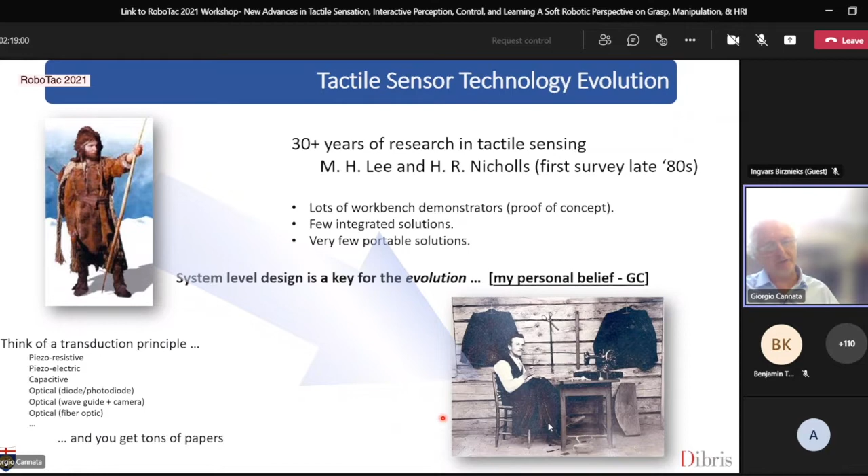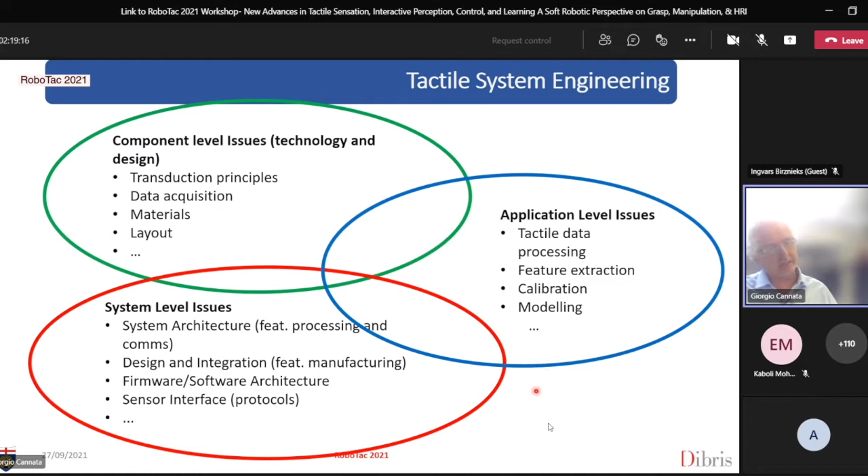So let me say that we moved over 30 years from very primitive demonstrators. We are now moving slowly to more sophisticated implementations. And the thing is that there's really a lot of issues that must be tackled if you want to implement a complete tactile-based solution. We arrived over the years at the development of a technology which is based on capacitive transducers. This is called CySkin. And as Catherine said, I cannot claim this is the best—it is just one of the possible implementations.

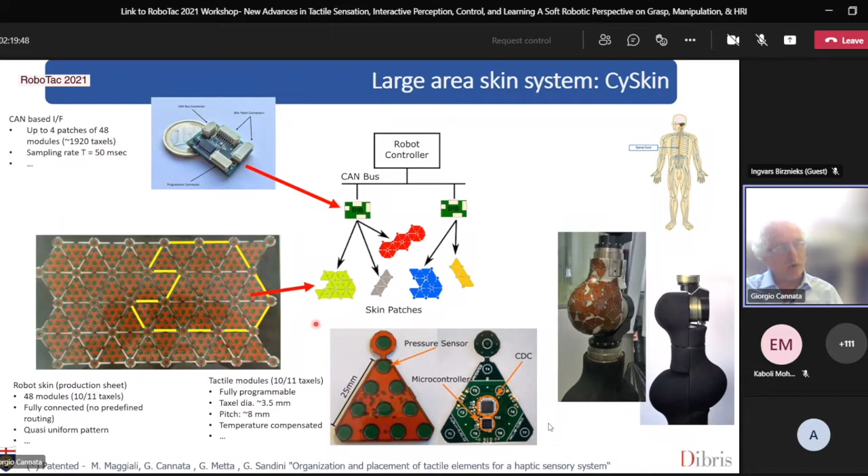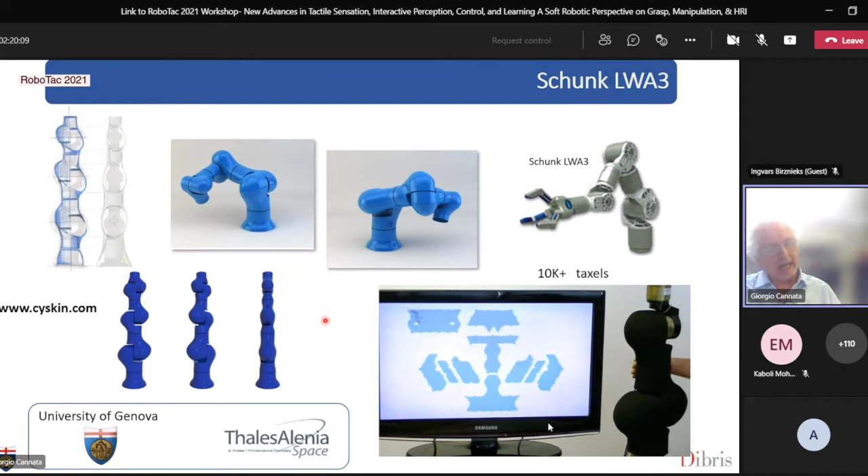So it's a pretty agile way of sensorizing different types of robots. We have implemented this covering of a Schunk LWA3 robot with over 10,000 taxels. I don't know if it's the most complex implementation, but it has been quite a challenge. And we also used the same technology to sensorize a Baxter arm, and again the number of tactile elements is pretty large.

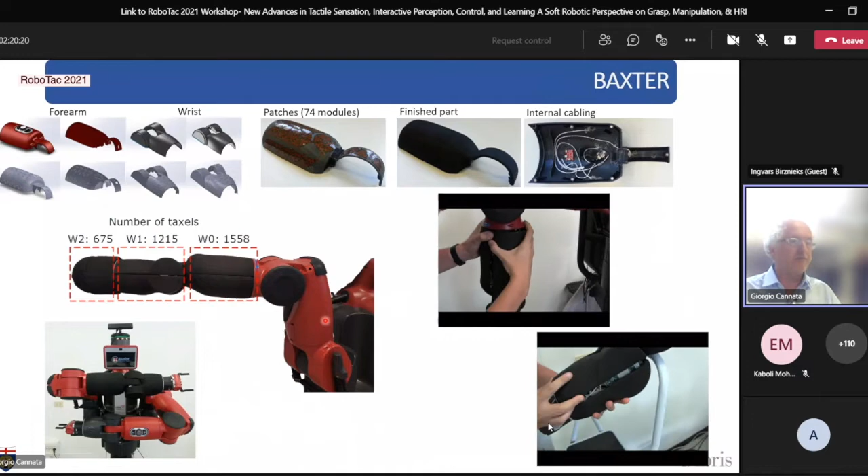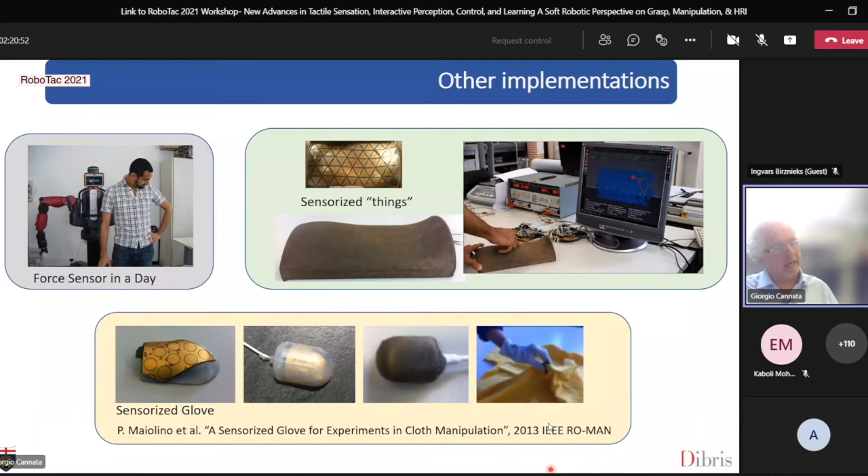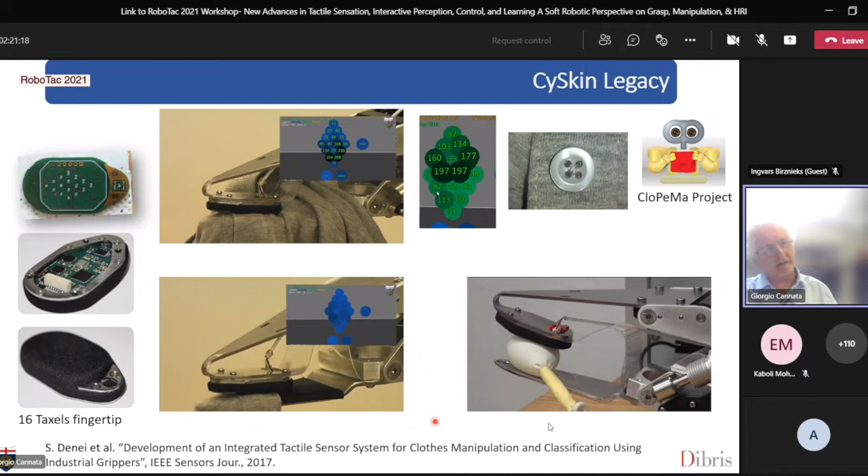Using the same solutions, we have implemented different gadgets. A force sensor in a day is a two-axis force sensor that was truly built in a few hours. We have used this technology to sensorize things, not just for robotic applications, and exactly the same hardware has been used to develop sensorized gloves. This is not enough, because using the same ecosystem we could develop other types of tactile sensors—in this case a fingertip with a 16-taxel matrix sensor that we used, and are still using, to recognize and classify textiles.

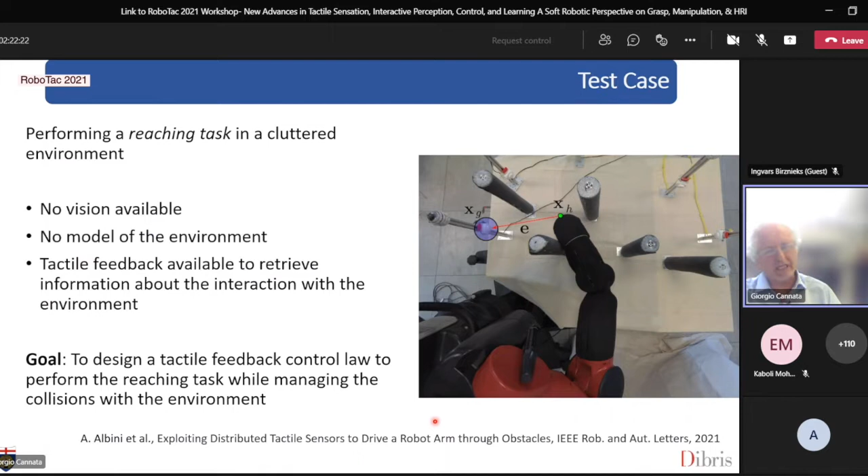The first step of the talk is related to robots touching. The test case I'd like to introduce is the problem of moving a robot arm in the presence of unknown obstacles, without using any of the state-of-the-art sensors typically used for this kind of application. So we assume that no vision is available, we assume no model of the environment is available, and what we wanted to show was that exploiting tactile feedback is a way of approaching this type of problem. You can think of this task as touching or finding objects beneath a table, reaching the workspace just using tactile exploration.

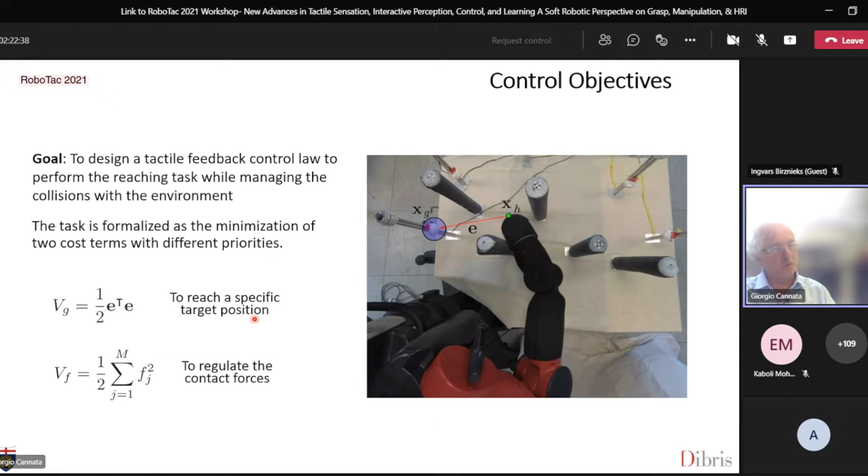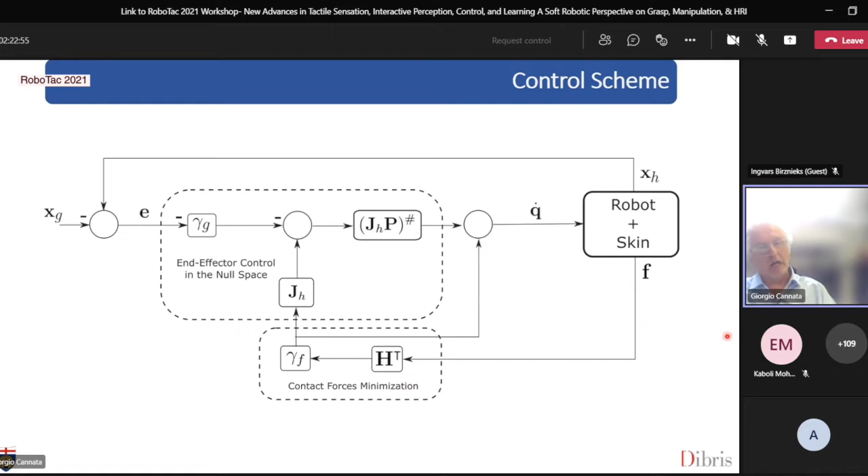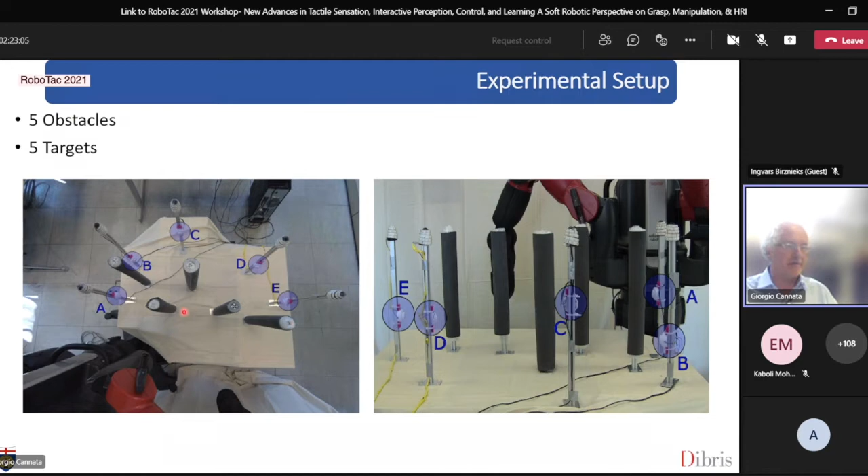Let me skip the details. We approached the problem as a priority-based control scheme with two goals: one is the final reaching position, the other is the problem of controlling the forces. The scheme we get is a cascade loop with a force and a position loop, nested loops, and these are some experimental results. This is the playground—we have 5 obstacles and 5 target points.

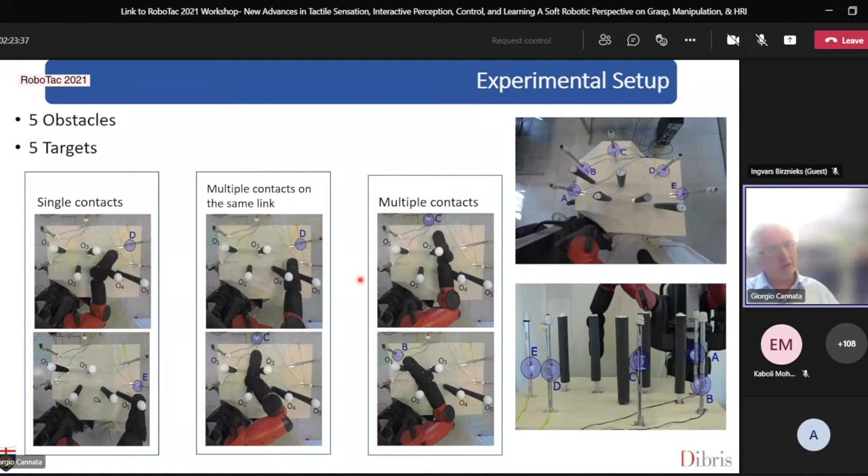And during the process of reaching the target point, starting from different initial conditions, you can be subject to different types of constraints: single contacts, multiple contacts on the same link, which makes the usage, for instance, of sensorized joints not so effective, and of course, multiple unpredictable contacts on different parts of the robot.

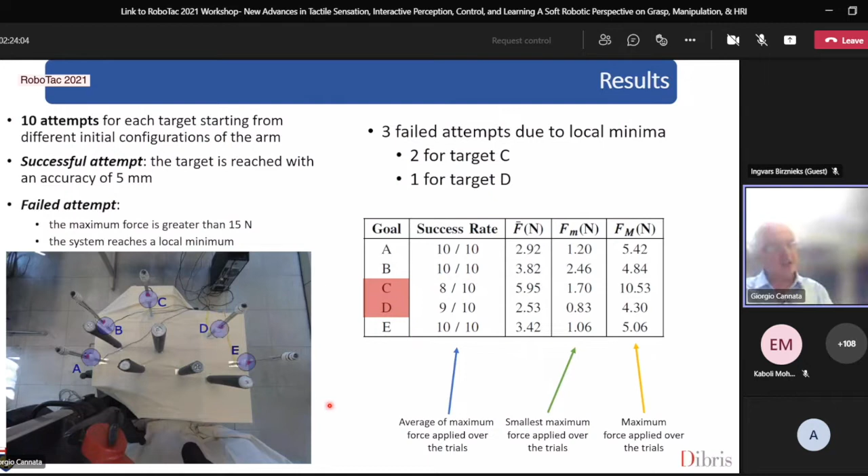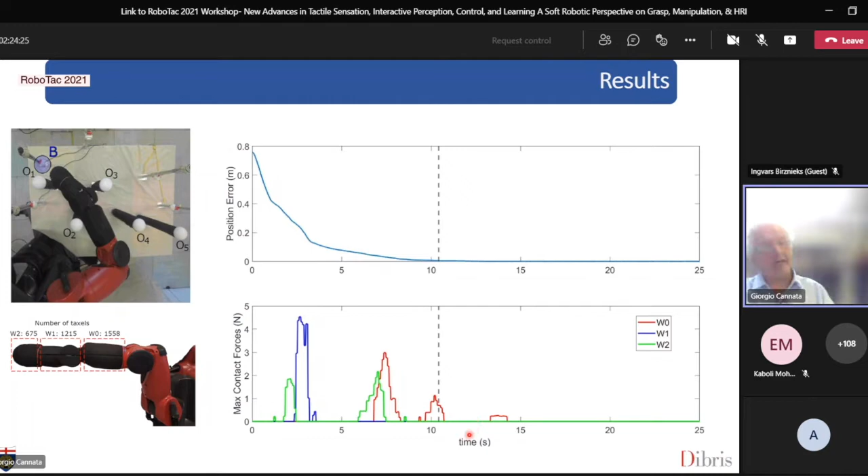The problem is complex, so we cannot pretend to have an analytical result, but the statistics that we got are that the method works, and works pretty well, because with a few exceptions, the task has been completed. This is a short view of the kind of events that happen during the motion. We have a quasi-exponential convergence of the position to the goal, with multiple contacts arising during the operation. And this is the result.

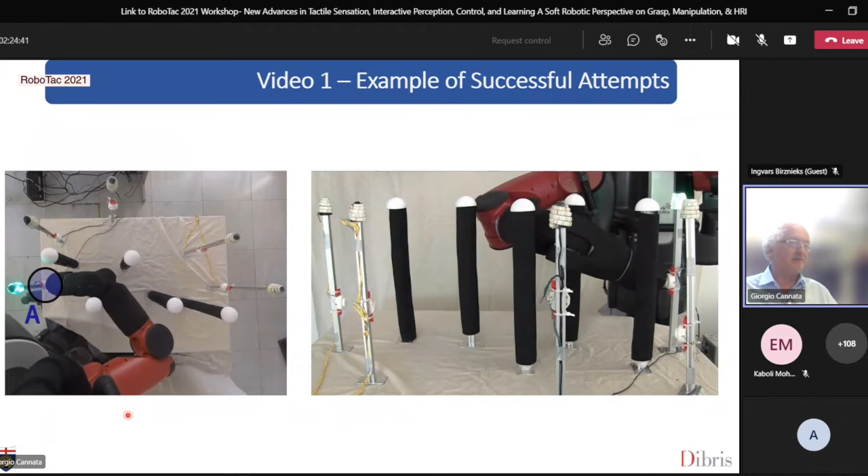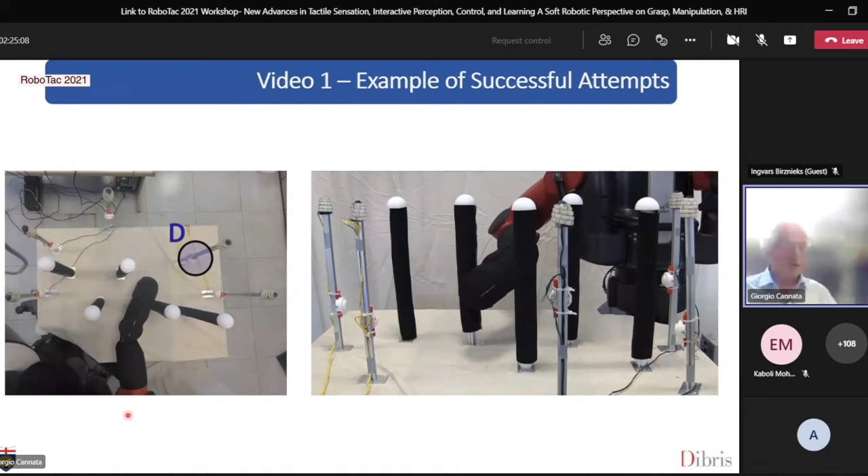Okay, this is a sequence of operations, and you can see how the robot moves. In this case, you will see two different results starting from different positions. The point D is reached with different strategies, and you can see on the right hand side that the motion is pretty natural.

Okay, and of course things are not always going well. This is a case where the robot gets stuck in a local minimum, despite attempting. In this case, it gets locked by multiple contacts.

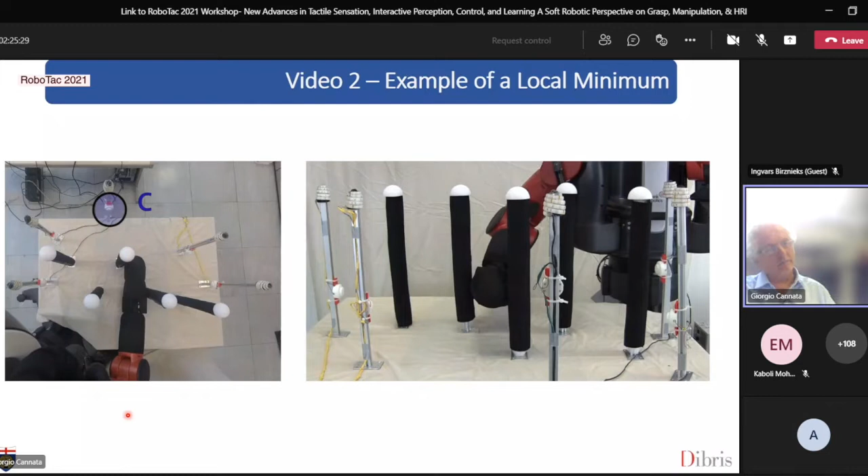Okay, so just a few remarks. What you have seen is, on one side, one way of exploiting tactile sensing to perform an autonomous task in a very non-structured condition. And of course, what we got is a sort of best effort strategy. There are ideas to go beyond that, and one of them is to adopt a SLAM-like tactile-based exploration strategy in order to enhance the robustness.

There is a difference, of course, between tactile sensing and vision, although we will see later that we can exploit some ideas coming from vision to process tactile data. And there are other ideas that in part will be explained in a paper later today by Alessandro Albini that will show you how the tactile data coming from complex geometry, like the one characterizing the shape of a robot, could be addressed for this type of operation.

So now we can move to the second side of the problem, which is touching robots. A few years ago, we started working with the idea of exploiting large area tactile sensors to allow a person to give a command. This might be used for teach by demonstration tasks or whatsoever. So we invented a sort of touching language. So in this sense, it is pretty natural to design a controller for this type of operation.

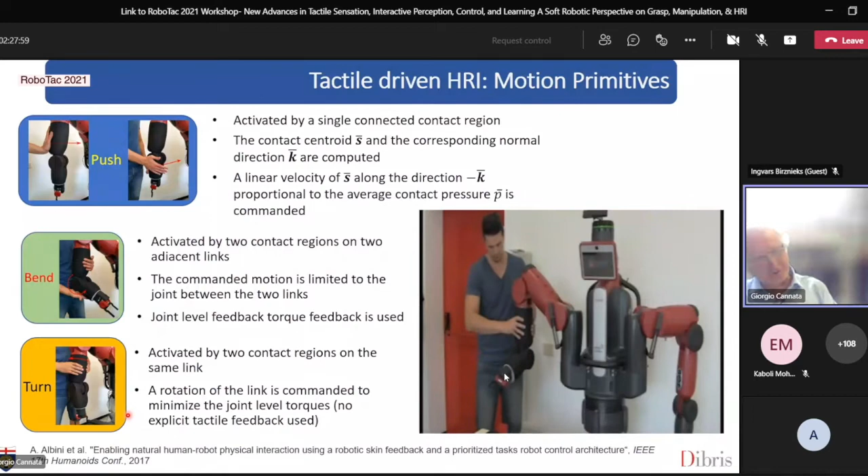But then we realized that one particular issue which might be relevant is to understand whether a contact is a purposive contact given by a person, or is an accident, or is a contact with the environment. So we started addressing a very specific and important issue, which is to recognize human touch and try to classify it. Now the question is how to proceed with the processing.

The ideas that we explored are somewhat motivated by how the tactile data are mapped onto the cortex of the brain. So we have a sort of transformation from 3D to 2D. So what we do is to transform the 3D representation of the tactile data into a 2D representation, and then transfer the processed information back into 3D. So what we do is basically the following.

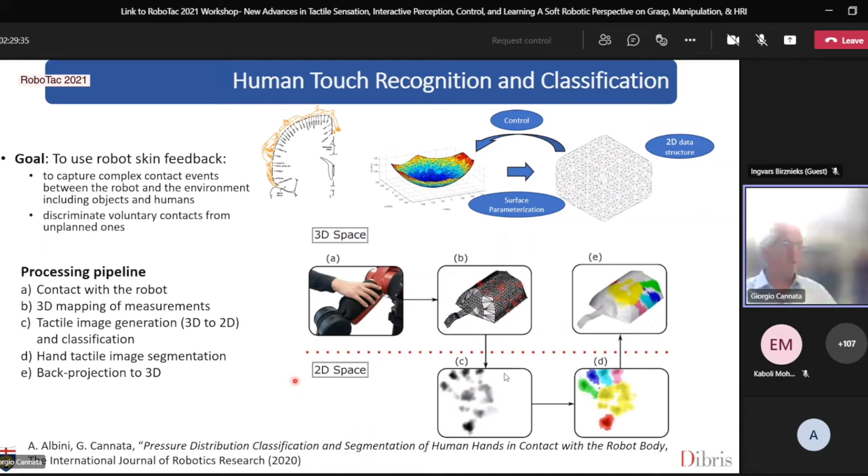We get a pressure map due to the contact. The contact is then transformed into a 2D, let me say, standard image. And then we proceed at this level with recognition to discriminate between human contacts, hand contacts, and non-human contacts. And once we recognize that the touch is given by a person, we segment the various parts of the hand, and in case back project them onto the 3D space.

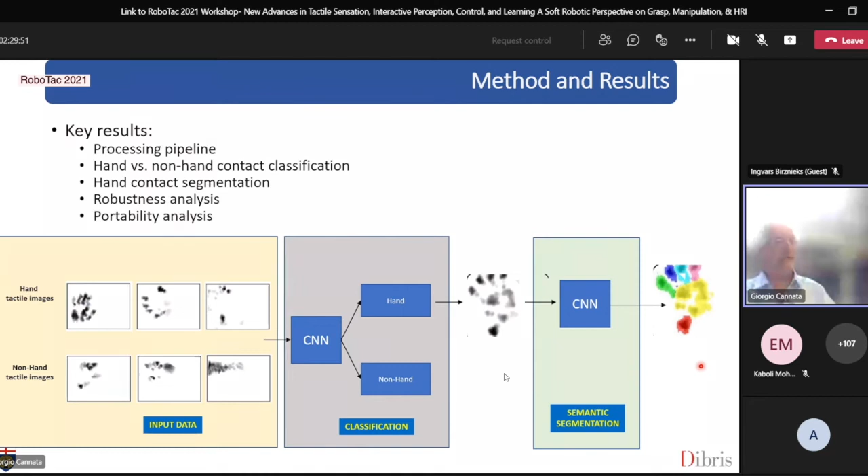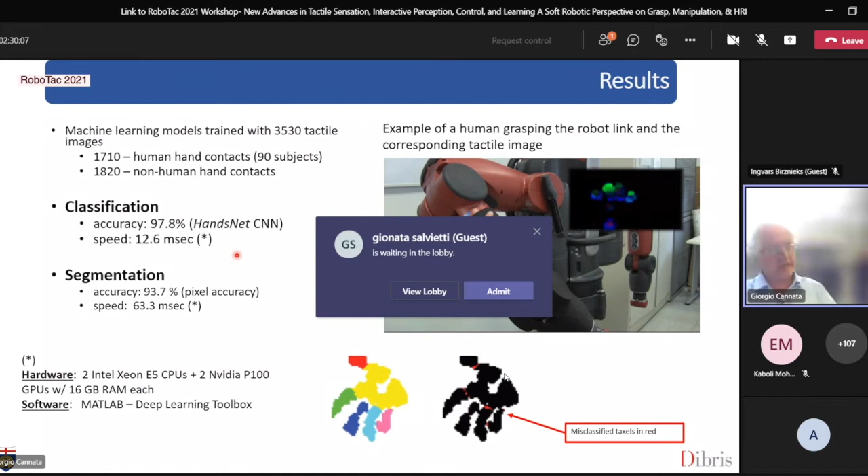We do this by using convolutional neural networks. In sequence, the first step is to perform a classification, and after that, a semantic segmentation. This is what happens in a very special case, and we designed a specific convolutional neural network that led to pretty satisfactory results, both for classification and for segmentation.

What is interesting is that we analyzed the robustness of this method and of the solution that we proposed in presence of failures. For instance, the robot skin is something which is prone to break. So we assume a degradation of the performance of the skin over time. And what we found is that the method based on convolutional neural networks is pretty robust in presence of patch failures.

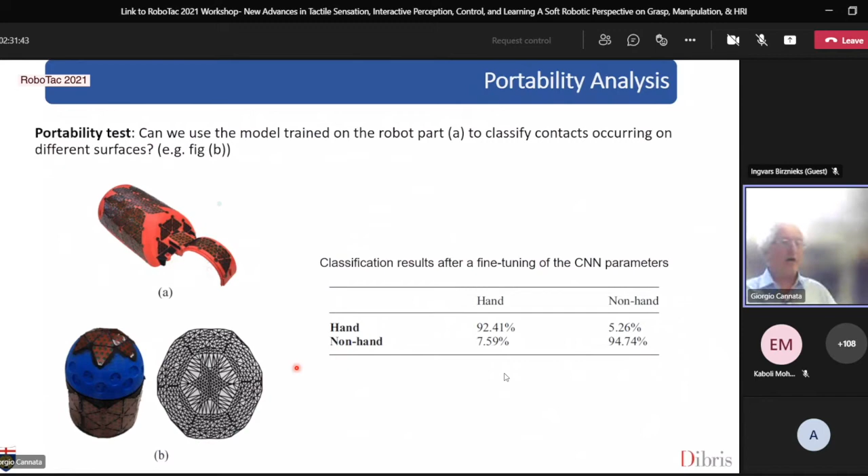given type of application. And the last step that we did was related to the possibility of porting the machine, the neural networks, on different types of geometries. And we exploited this portability issue in a practical case where we are involved. Collaborate is a European project where the task we are involved in is the problem of human-robot collaborative tasks.

We have a very big, heavy-duty robot which supports a windshield, and the human operator is expected to perform some inspection and assembly operations on the windshield. So in this case, the idea of using tactile sensors was motivated by the possibility of enabling a tactile-driven control of the motions of the arm if the system recognizes that the touch is a purposive one. So it enters fully within the ideas that I explained before.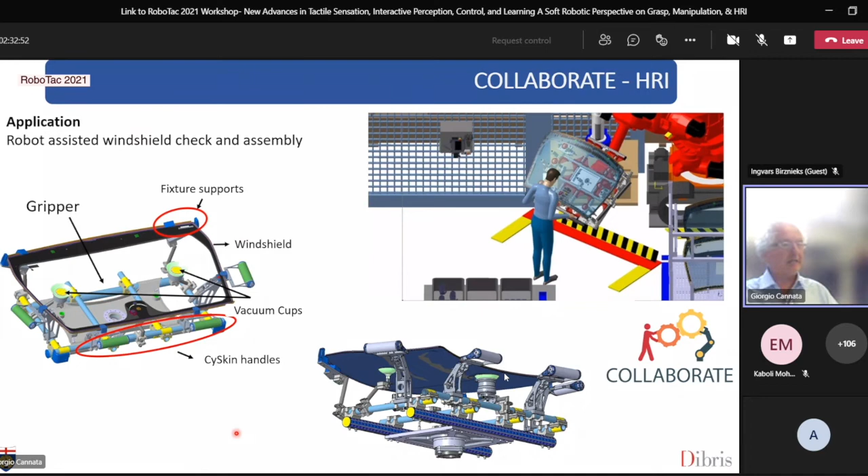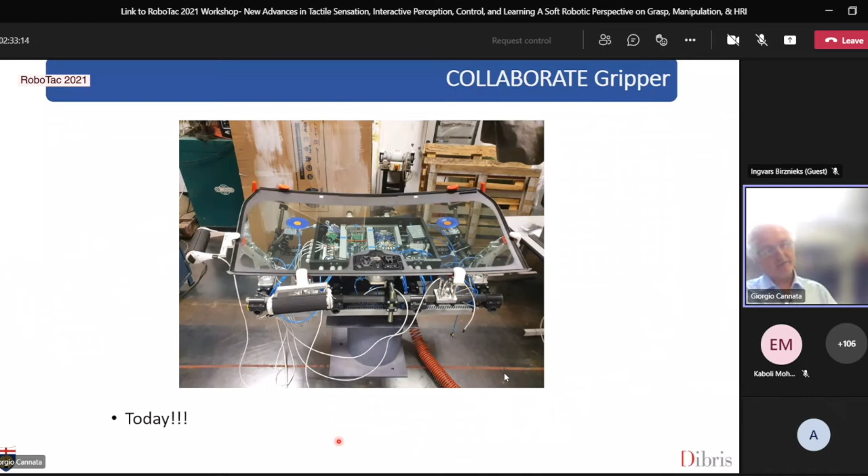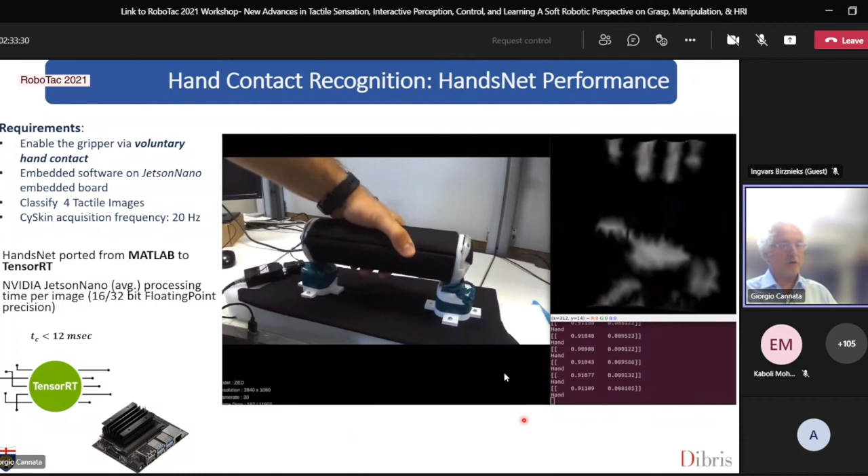This is the prototype of the CySkin handles that we have developed. And this is what's going on today. We are proceeding with the integration of the hardware on the gripper. We expect to start the experiments in the next few weeks. And these are some desktop results. As you can see, under different conditions, we are able to recognize the contact with the hand.

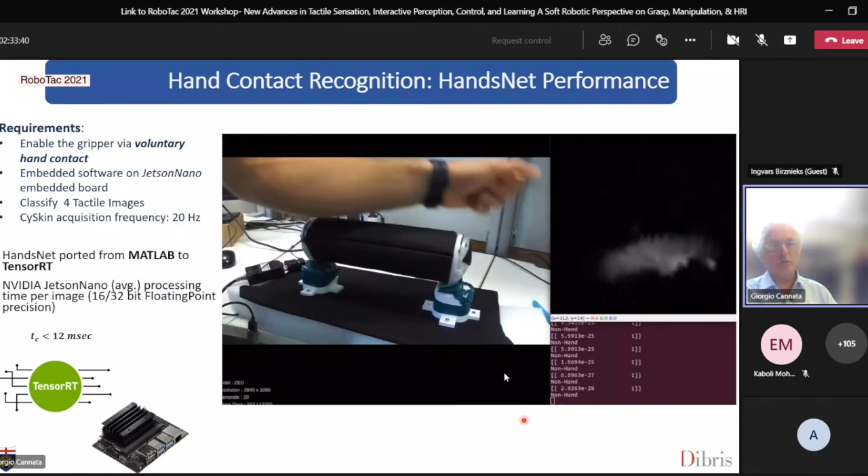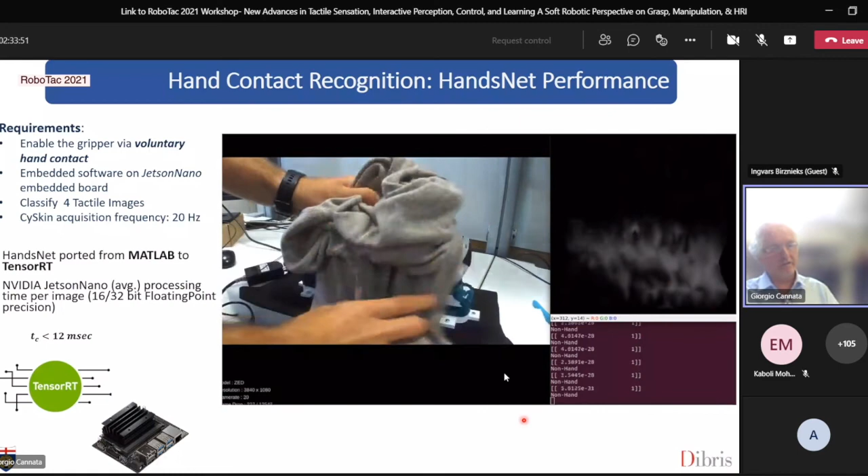And as you will see, there is also the possibility of recognizing multiple hands, multiple contacts with the hands, and to discriminate between purposive and non-purposive types of commands. And of course, this is another example of possible types of interaction that might arise.

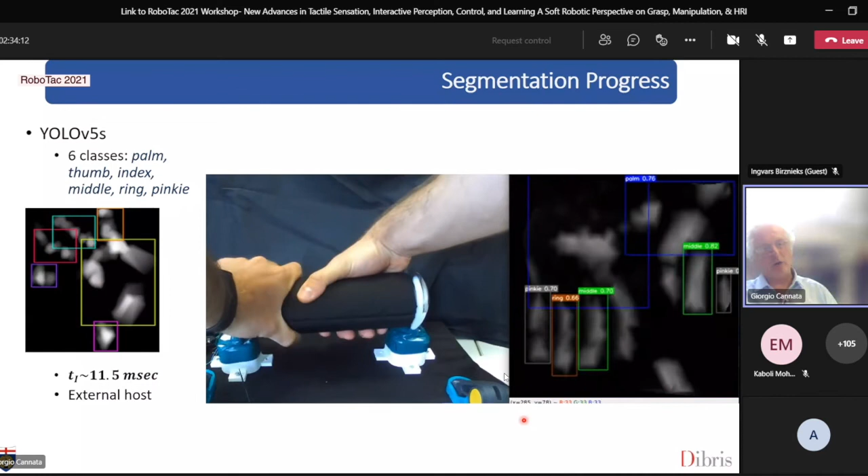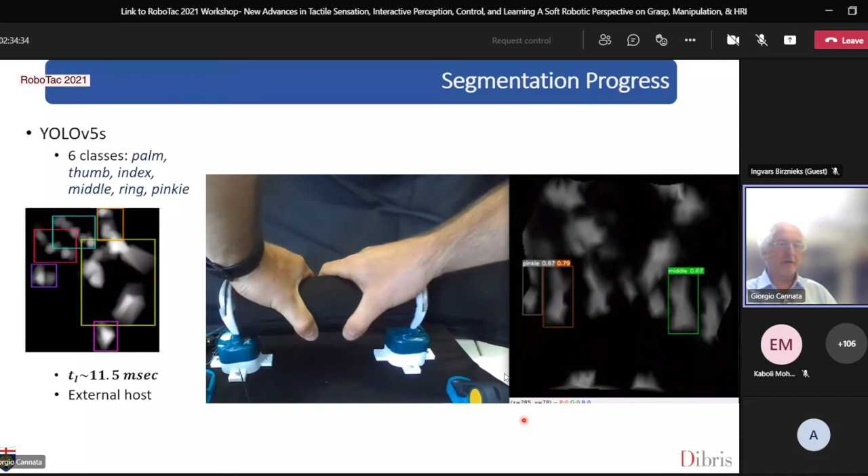This is the example of the segmentation with respect to the recognition that we could implement on an embedded computer installed on the gripper. In this case, we need to use a quite powerful machine. So at the current stage, it's not implemented using an embedded computer. But as you can see, there is a pretty good capability of segmenting and recognizing also multiple hands.

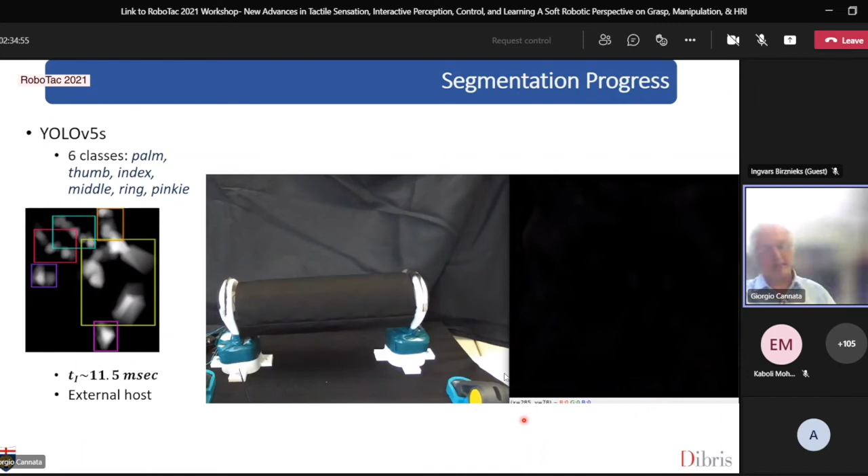By the way, in this example, we perform frame-by-frame processing. We have not yet implemented any time filter, so there is no temporal filtering. So every tactile frame is processed in sequence. The very last bit, time is almost over.

There was a third chapter in this discussion, which is robots touching robots. We have made experiments over the years on self-calibration of robots. I haven't mentioned that calibrating tactile skin is sometimes not an easy task. You have to repeat it from time to time, and this is because we are working with tailor-made solutions, so there are not yet industry-grade solutions portable for different robots.

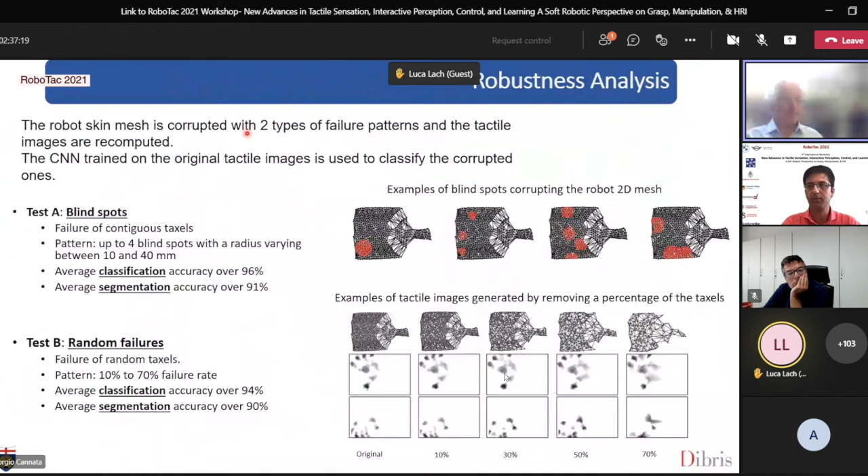Yes. Hi. Thank you for the interesting talk. I have a question regarding the hand classification. Did you train this yourself? And if not, how does it generalize across different hands? Okay, let me move back. Yes, the recognition at this level was made using 90 subjects. So the number of people involved was quite large.

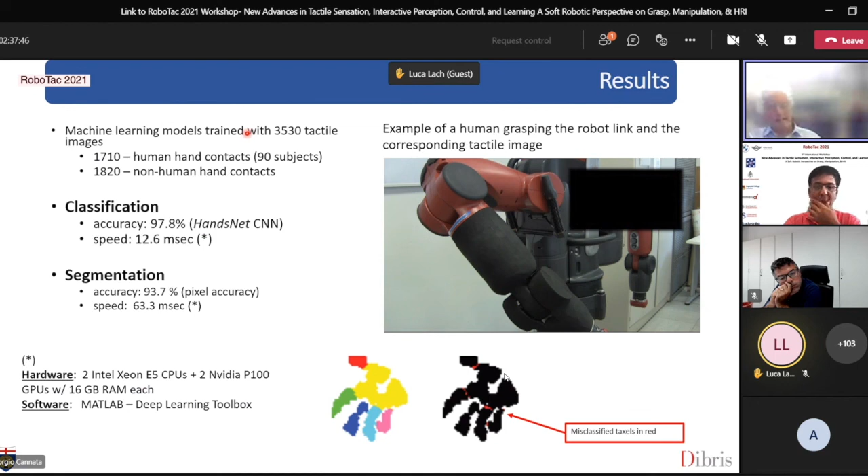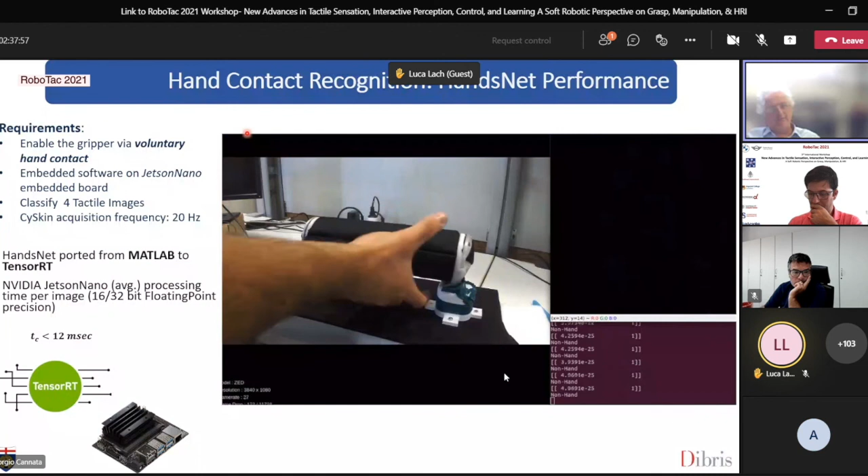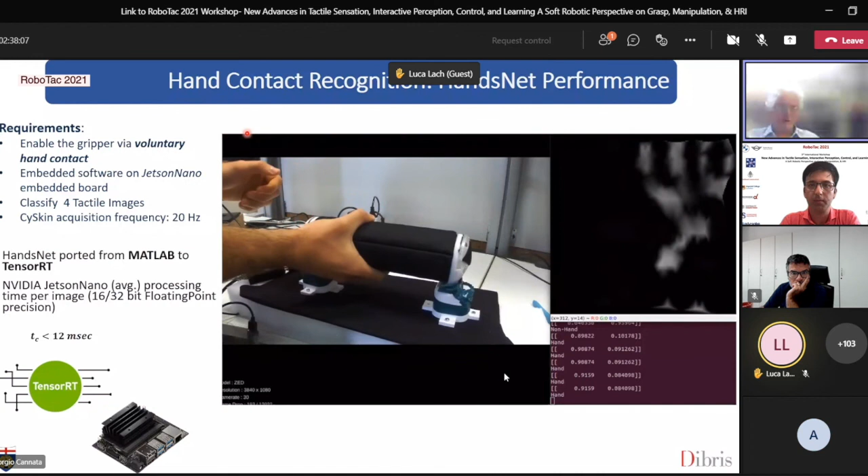As you can imagine, this is a tedious part. And we exploited the fact that we could use this trained network as a starting point for the second implementation, the handle implementation. In this case, we started from the originally trained machine, and we performed just a fine-tuning on the classifier side of the network. So basically, in this case, the convolutional layers remain the same as in the original network that I showed you.